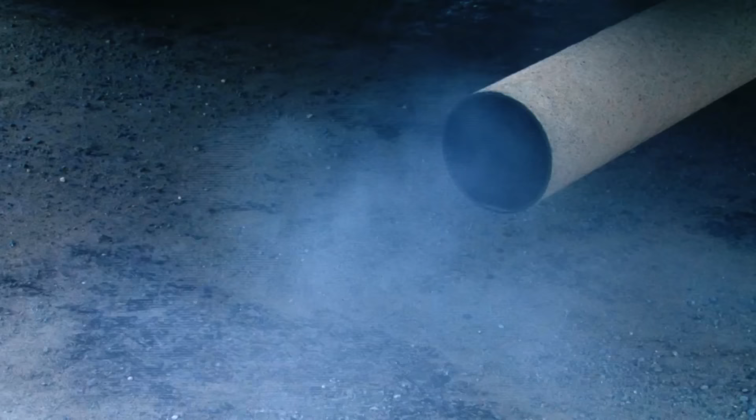But Swiss engineers like Renzo Simoni are facing a seemingly impossible problem. In recent decades, traffic has increased tenfold, and the mountain passes are grinding to a halt. Nowadays there are 1,200,000 lorries crossing the Swiss Alps every year, so we have to do something.

The Swiss solution? To bore a tunnel, the like of which the world has never seen. This is the biggest and most complex and of course most expensive project Switzerland has ever done. The Gotthard Base Tunnel will be 57 kilometers long and lie almost 2.5 kilometers below the mountain peaks. If Renzo and his fellow engineers can pull it off, it will be quite literally a groundbreaking engineering feat.

This is the longest railway tunnel we are building now here. It's 57 kilometers long, and that means it will be a world record. But constructing a tunnel of this scale is far from straightforward. We have many logistical problems. We have high overburden up to 2,500 meters. We have water which is coming inside the tunnel from time to time. We have the rock heat itself with temperatures up to 45 degrees. So there are a lot of challenges.

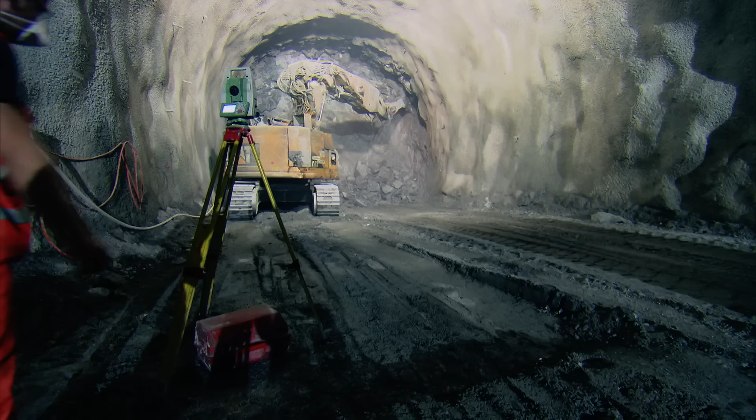While tunneling, you have different dangers. It may occur that water comes in under high pressure, big amount of water, so that could be a problem. Or if you have a collapse of the front of the tunnel with material coming down.

Dirk Kruger from Amberg Technologies is a geophysicist facing the challenge. The normal condition is that we go in tunneling quite blind because nobody has been there before. And the situation is very complex in the Alps. Geology can change from meter to meter.

The extreme depth of the tunnel rules out conventional surveying that takes samples from above. And being unable to predict the geological conditions ahead could be catastrophic. So if you have a big water-bearing zone, this is the worst case because you have tons of water which are coming suddenly. The solution to this perilous problem lies in one of history's great inventions.

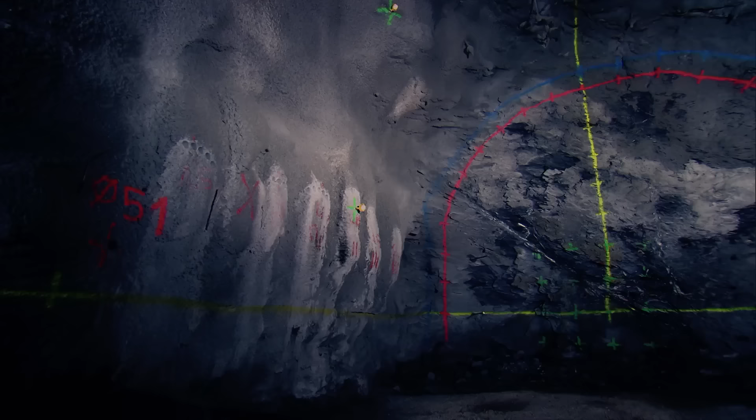Japan is the most seismically active country on Earth, with roughly 1,500 quakes registered each year. For centuries, little was understood about their cause, nor where they may strike.

That was until 1880, when, on a survey in Japan, British mining engineer John Milne experienced a severe quake and began to record their behaviour.

What I've created here is a simple demonstration of a seismograph. I've got a pen attached to a pendulum. When I shake the table and pull the paper through, you'll start to see the pen record the number of shakes on the paper, and that represents the frequency and the amplitude, or the number of times per second of the shakes and the size of those shakes.

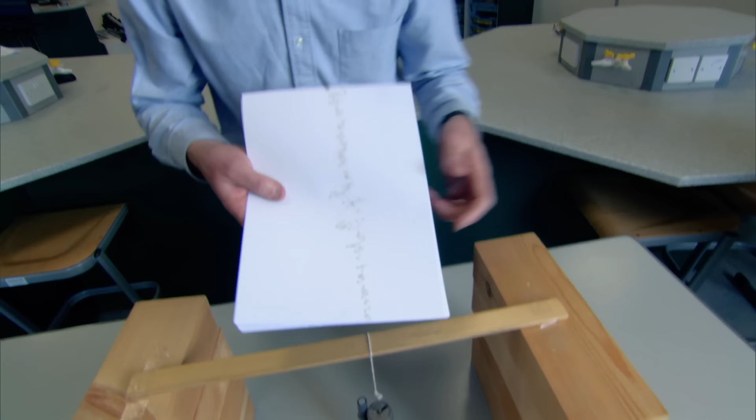So, let's give it a try. My assistant Kirk here is going to come and shake the table, and as I pull the paper through, you can start to see the trace on the paper, and then if Kirk gives it a really big shake, you can see that increase in amplitude, and then as it calms down, it gets less again. And we can see here where the really big shake was compared to the rest of the time. It's a really simple but quite effective demonstration of how a seismograph works.

John Milne and a team of engineers took this very simple concept and enhanced it, devising the first continuously running seismographs which could detect the epicenter of the quakes in Japan. A design that was taken up and used all over the world.

In order to see through solid rock, engineers building the Gotthard Tunnel will adapt Milne's innovation and make waves of their own.

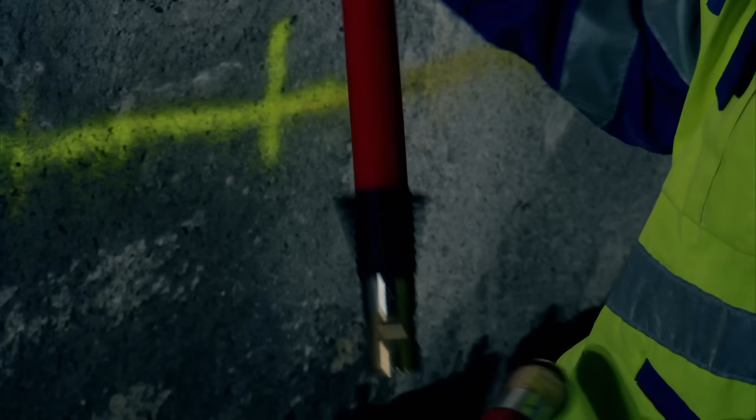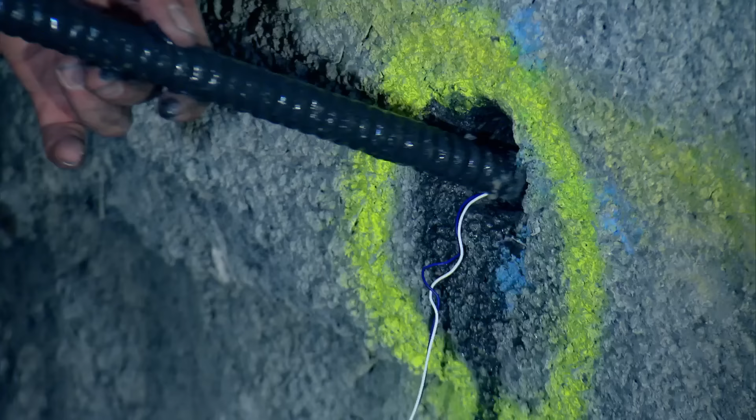Normally the seismographs are monitoring signals in Earth. Here the difference is we create a signal, a small earthquake, which creates waves traveling through the rock. At the VSH Hagerbach Tunnel Research Facility, seismic prediction experiments are undertaken for the Gotthard project. Explosive charges are placed within the rock face. Once detonated, each sends out shockwaves which are measured. This wave travels through the rock until some condition in the rock changes. Distinct geological features reflect the waves differently, providing a picture of what lies ahead.

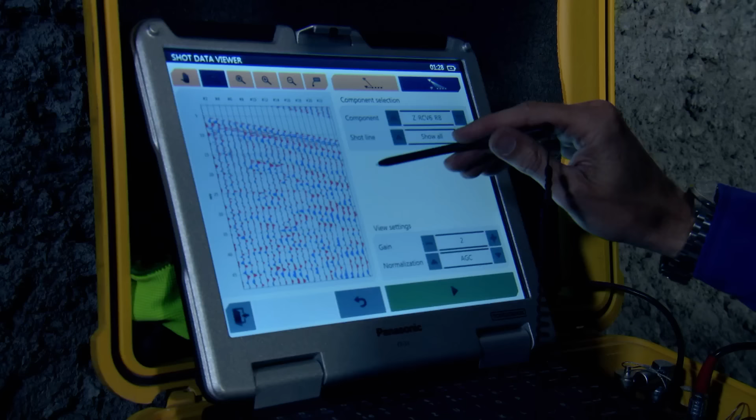Everywhere where we find these lines, there is an area where we have changes in rock conditions. In water, they travel quite slow. In air, they're more slow. With this system, we are able to have a real impact on the tunneling progress.

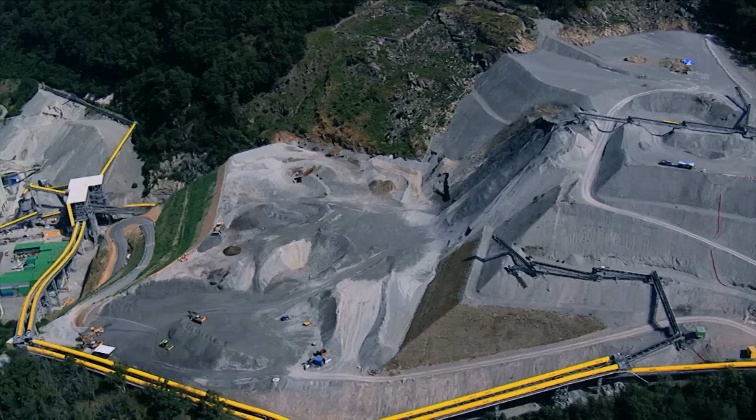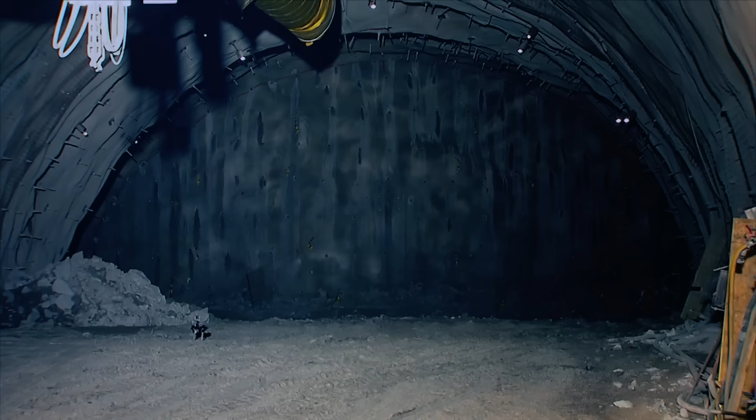Construction begins on history's most ambitious subterranean project in 1996. The route will consist of 2 tubes. To reduce construction time, the work begins from 4 sites simultaneously, with the ultimate goal that the tunnels will join up underground.

But in creating the world's longest and deepest subway, engineers will face many more challenges, and will have to draw on the innovators of the past. Now this place is really incredible, really amazing. To make the impossible possible.

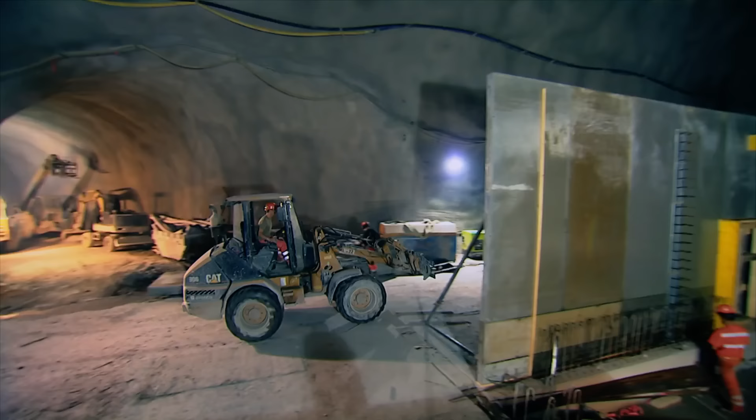In the mountains of Switzerland, engineers are undertaking one of history's most audacious construction projects: a 57-kilometer rail tunnel driven straight through the Alps. It will be the longest and deepest ever built, a feat once thought impossible. It's really a big innovation to do this. It's very, very tough. Sometimes it's like unbelievable that it's real.

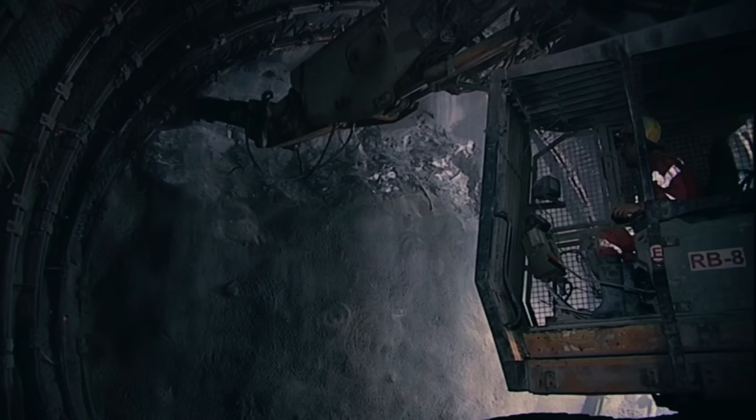Renzo Simoni is one of the team charged with turning the dream into reality. But they face a series of monumental engineering tests. It's the longest tunnel ever built. We have, of course, very different geological zones to get through. So how do you dig a tunnel that far without taking centuries to do it? It's a challenge that would have been impossible without history's great engineering innovators.

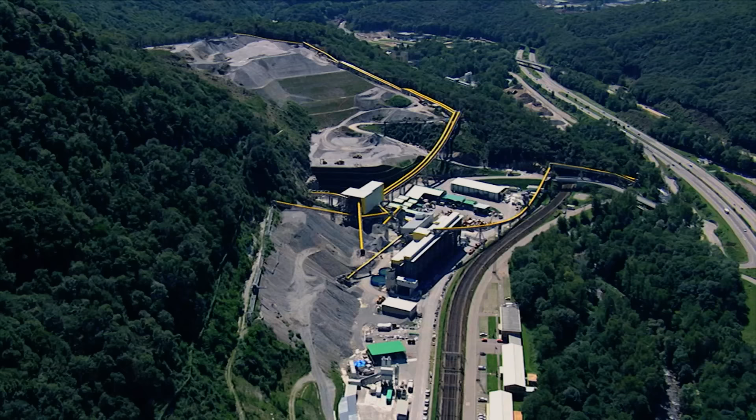London, England. Every day, 4 million people descend into a complex underground network of tunnels, more than 20 of which crisscross their way beneath the mighty River Thames. But it wasn't always so. By the early 19th century, Londoners had given up all hope of having a crossing beneath the river.

As engineer Professor Luke Bisby is investigating, several previous attempts to tunnel under the Thames had failed, and the problem was the soft and malleable London clay and sand. Hard rock miners had come from Cornwall, but the techniques they used on hard rock had failed, leading to collapse and flooding. Eventually, it was decided that the project was impossible, and it was written off.

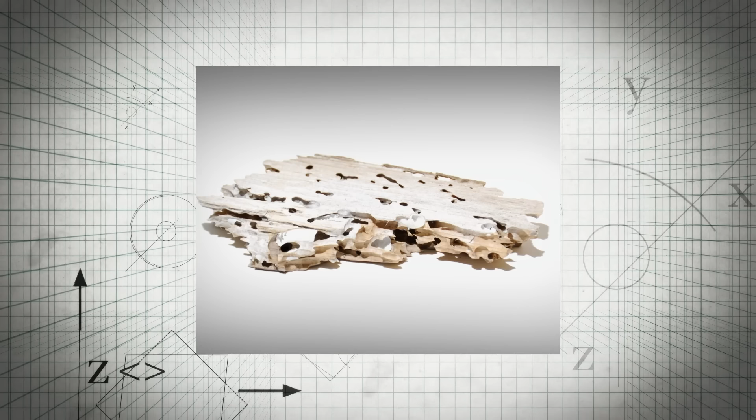But Anglo-French engineer Marc Brunel, father of Isambard Kingdom Brunel, had a brainwave. As a naval cadet, Brunel had observed the perfect tunnel-like structures left by mollusks called shipworms as they burrowed through timber.

Brunel's idea started an underground revolution, hidden remnants of which can still be found.

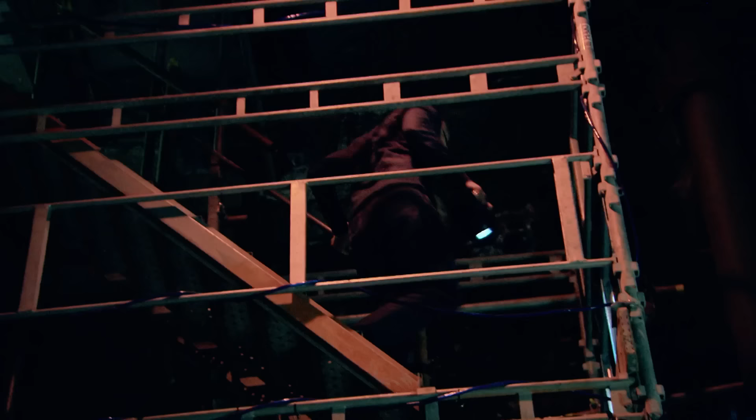Now this place is really incredible, really amazing. Through a tiny door up at the street, down a rickety old scaffolding, and we find ourselves here in this cathedral-like space. From this access shaft, Brunel drove the first ever tunnel under the Thames, using his engineering equivalent of the shipworm.

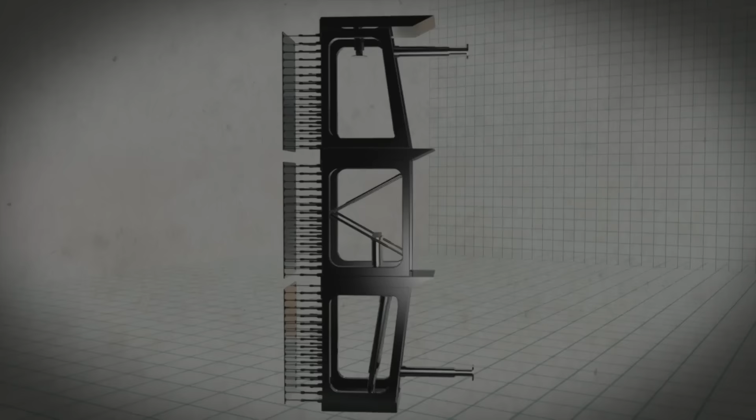A mobile steel framework called a tunnelling shield acted like the worm's hard head, supporting the earth and preventing collapse. Working in individual compartments, miners excavated just 4 inches before the whole tunnelling shield was pushed forward using screw jacks. A second group of men working behind them would be lining the tunnel with bricks to prevent its collapse.

Finished in 1843, Brunel's Thames Tunnel was hailed as the 8th wonder of the world, with almost 50,000 visitors on opening day alone. Today, it forms part of the London Rail network, and it all began in this hidden chamber. Most people would have no idea that it's here, but of course its importance to engineering and to tunnel engineering in particular really can't be overstated.

The Gotthard Tunnel will be more than 140 times longer than the Thames Tunnel, a feat that would be near impossible without Marc Brunel's innovation. In order to chew their way through the Alpine mountains, Renzo and his fellow Swiss engineers are using the modern supersized equivalent.

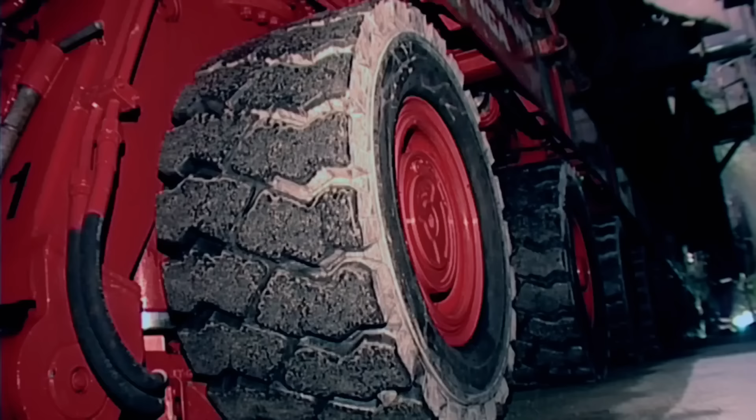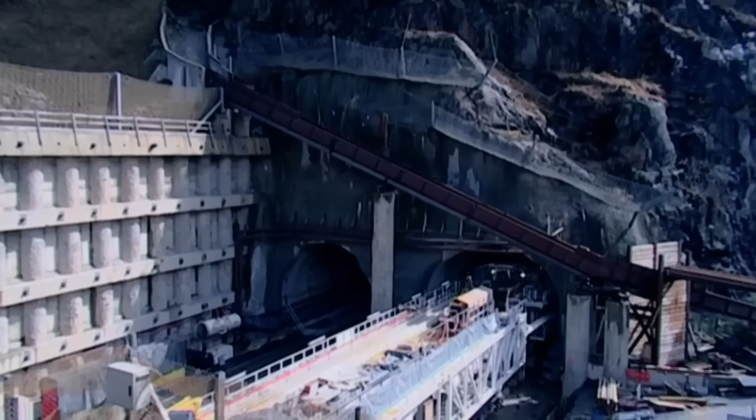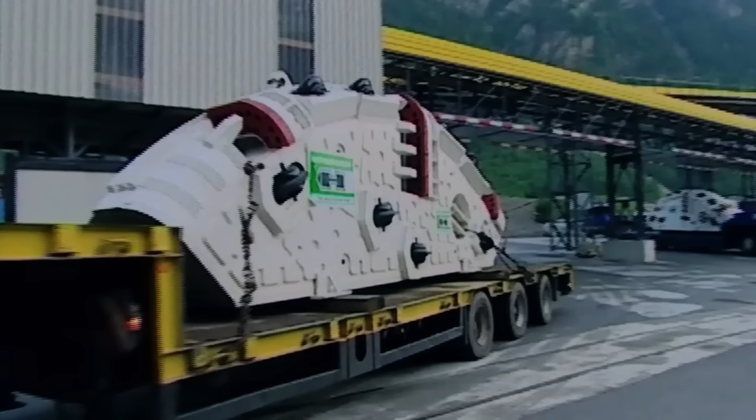These machines are really very amazing. You have to imagine it's 400 meters long, the whole machine. Almost the same length as the Thames Tunnel and weighing 3,000 tons, these tunnel boring machines, or TBMs, are some of the biggest land vehicles on Earth. So huge, they're shipped in sections and assembled on site.

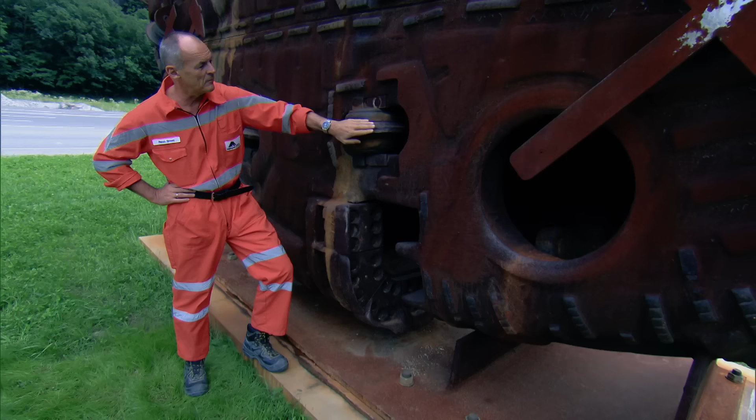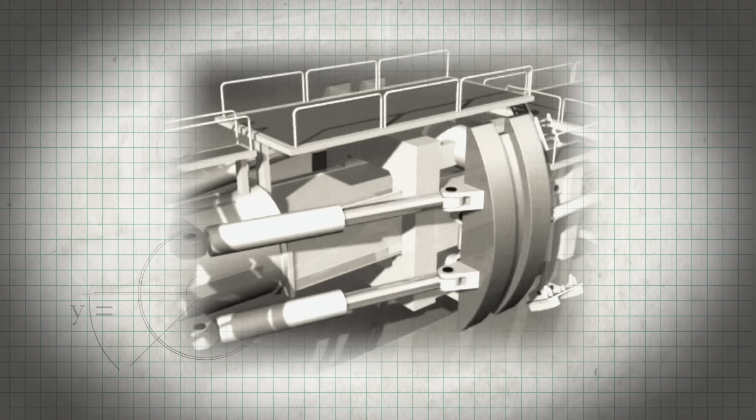This is the head which is rotating, and we have about 60 of those discs which are scraping the rock, so it advances like a worm in principle, step by step. The head turns and breaks chips from the rock, each disc exerting a force of 32 tons. The excavated rock is passed back through the machine on a conveyor. The TBM is then pushed forward into the void on hydraulic legs.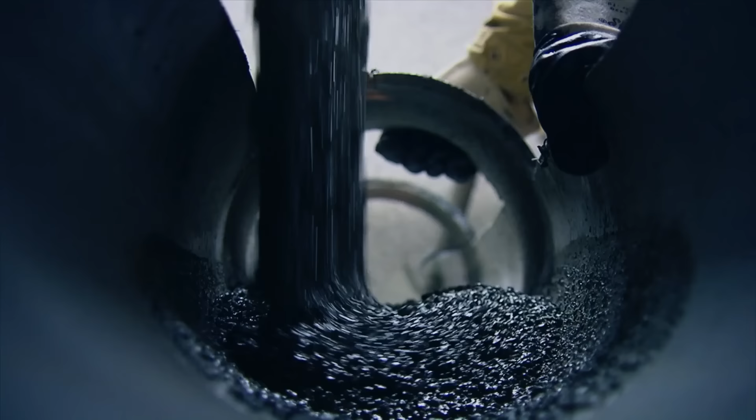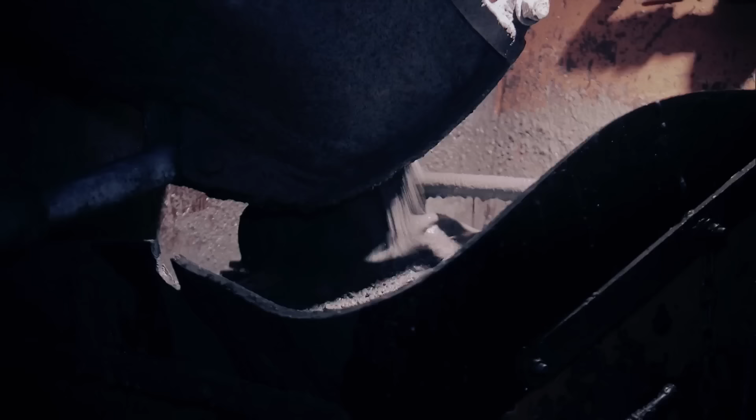20 years or 30 years ago, it would not have been imaginable. These mechanical mollusks can munch through 40 meters of rock a day. Behind it, instead of Brunel's bricks, the walls are sprayed with shotcrete, a form of liquid concrete. Shotcrete is the first safety measurement after excavation and is applied at the walls to assure that no pieces of rock is falling down. With this shotcrete lining, the tunnel is safe.

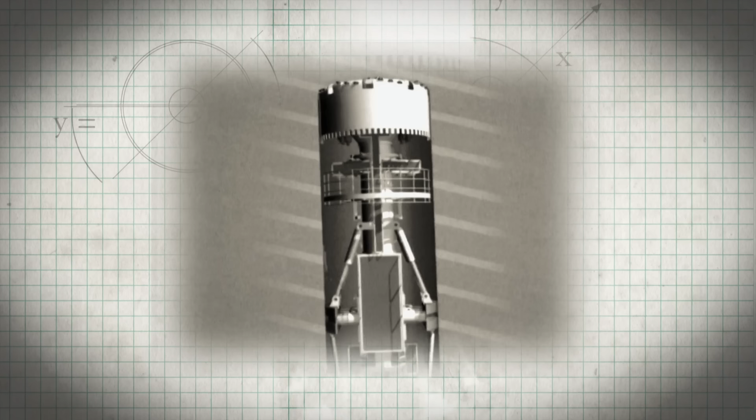The giant TBMs carry all the equipment and materials required to bore and reinforce the tunnel. Automation undertakes many of the tasks that Brunel's bricklayers once did. All in all, they measure the length of 4 football pitches stretched end to end.

Figuring out the direction to send these mighty machines is its own challenge. Calculating a straight route can be difficult enough on the surface of the Earth. There are trees, hills, and other obstructions to overcome. But it is possible to use landmarks to navigate, or build towers to get direct sightlines. Finding your way beneath the Earth, where even the slightest miscalculation could result in disaster, is surely impossible.

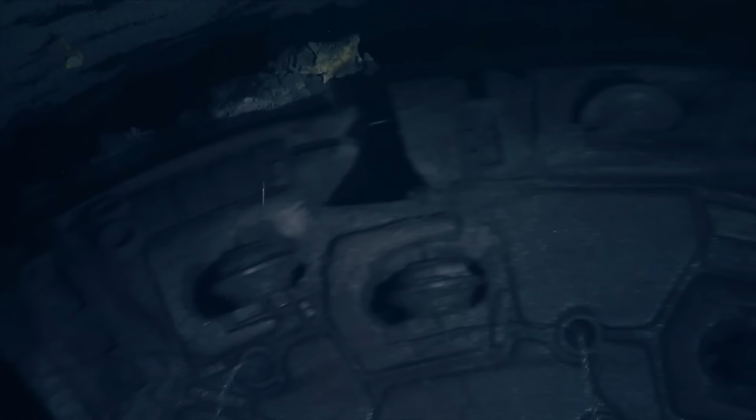Getting the TBMs meeting in the middle is a very, very big challenge because we have so long distances. The solution relies on one of the greatest innovations of the 20th century.

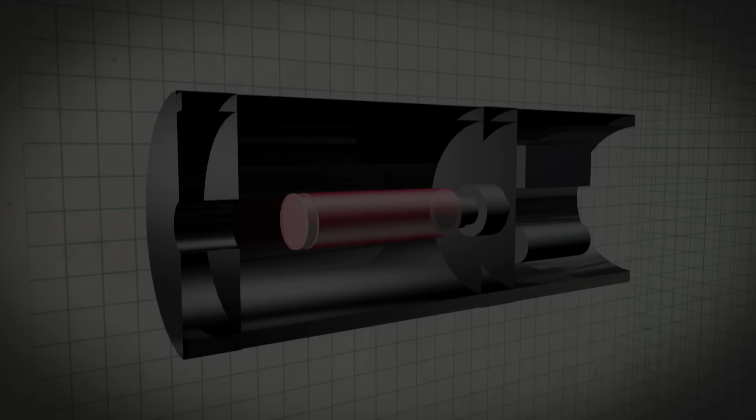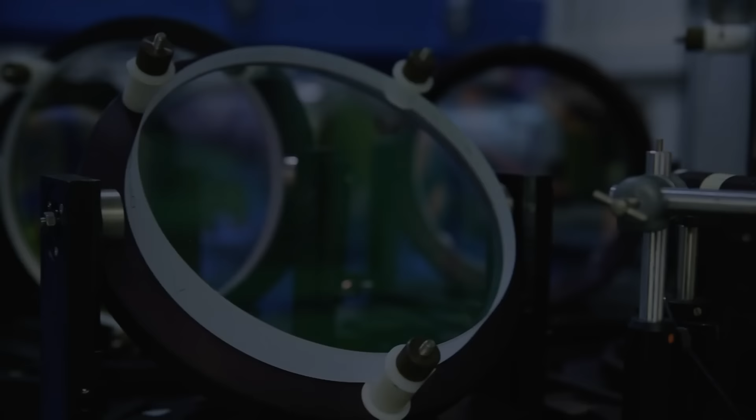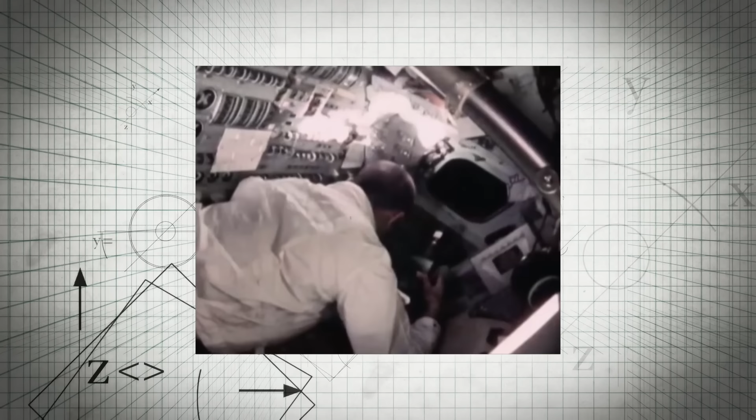In 1960, American Theodore Maiman built the world's first laser, out of basic materials he bought from catalogues. Placing a small ruby within a photographer's flashbulb, he was able to excite atoms, causing them to emit light particles called photons. His creation would change the world, allowing highly accurate measurements to be made over great distances. Less than a decade after Maiman's prototype, lasers were bounced off reflectors on the surface of the Moon, so the Apollo 11 mission could accurately calculate its distance from Earth for the first time.

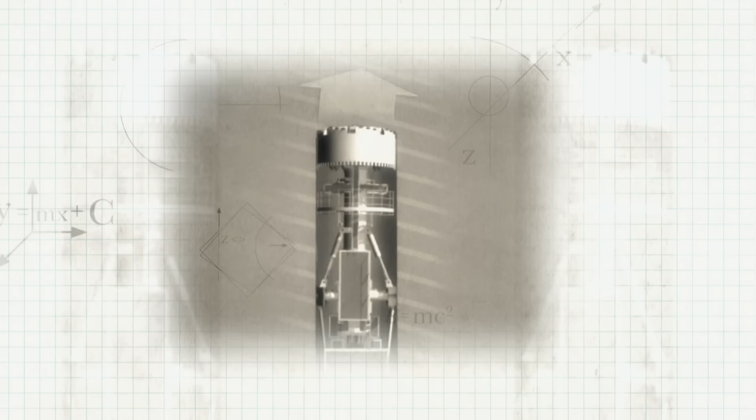In Switzerland, guiding the huge boring machines will only be possible with the help of lasers. First, GPS is used to map the entire route. But with no satellite signal below ground, each TBM relies on a geodetic guidance system, using incredibly precise measurements to stay on track.

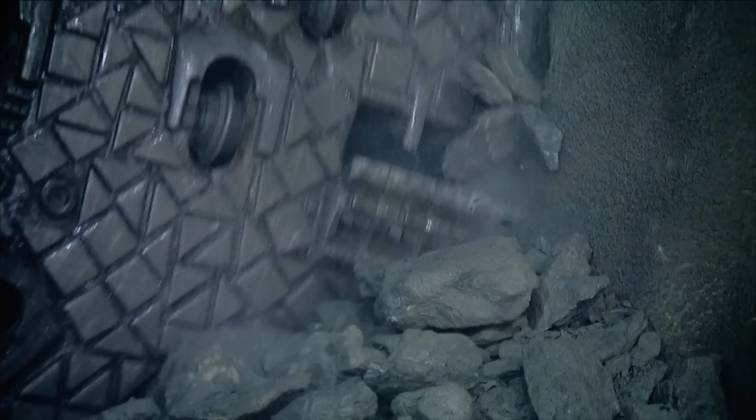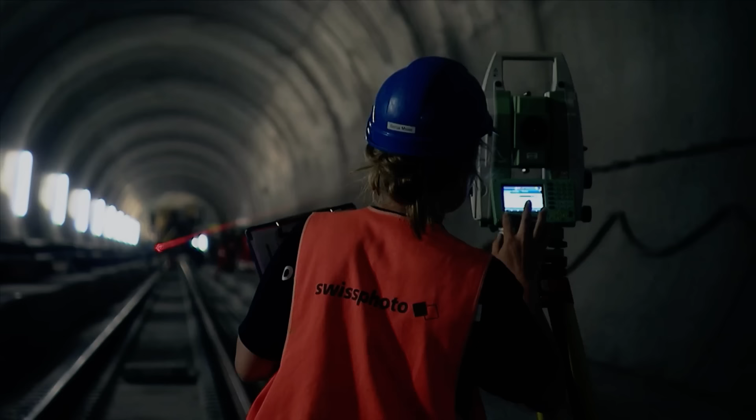You are measuring the angles and the distances, and this is trigonometry. A laser theodolite is attached to the tunnel wall and fires a beam at a target on the front of the TBM. The laser pointer indicates the precise direction, so the commander of the machine always has control, and he can choose very, very small corrections.

But with 57 kilometers of mountain ahead of them, Renzo and the team won't always be able to rely on the massive TBMs. Let's get out of here. They will have to draw on more innovations from the past to make the impossible possible.

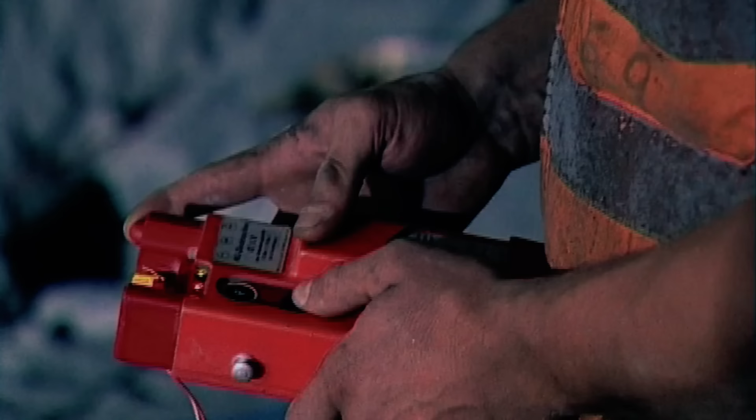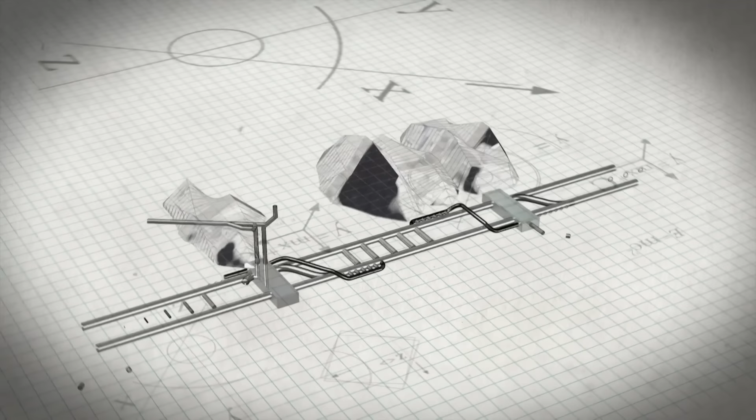In Switzerland, engineers are undertaking one of history's most audacious construction projects. To reduce alpine gridlock and pollution, they're attempting to build the longest and deepest rail tunnel in the world. For Switzerland, it's very important to reduce the traffic by freight lorries crossing the Alps. The Gotthard Base Tunnel will slice a 57-kilometer route not over the Alps, but straight under them. With our tunnel project, we bring the northern and southern parts of Europe closer together.

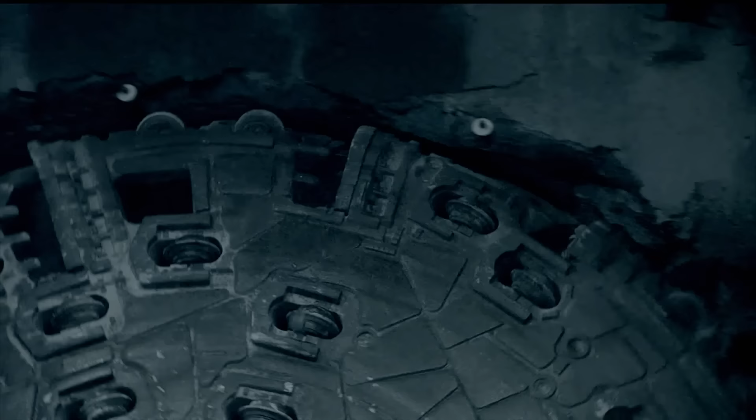Cutting-edge surveying guides the giant tunnel boring machines, or TBMs, through the mountainside. But digging a tunnel deeper than anyone has attempted before leaves Renzo Simoni and the engineering team facing another seemingly impossible challenge. One that the TBMs can't overcome.

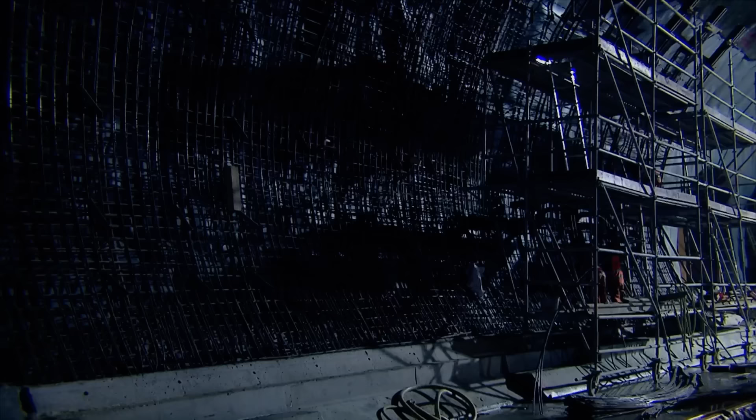You can use tunnel boring machines only in conditions where you have hard rock, which is not squeezing. If you have pressure on the machine, it wouldn't work anymore. That would be a problem. So you can use those machines only in very good rock conditions.

Squeezing occurs when the pressure of the mountainside combines with weaker rock types. In extreme cases, it can result in the tunnel closing up again after it's been bored. Squeezing rock is like if you make a dough at home and then you put a finger on it and took the finger out, then it tries to close.

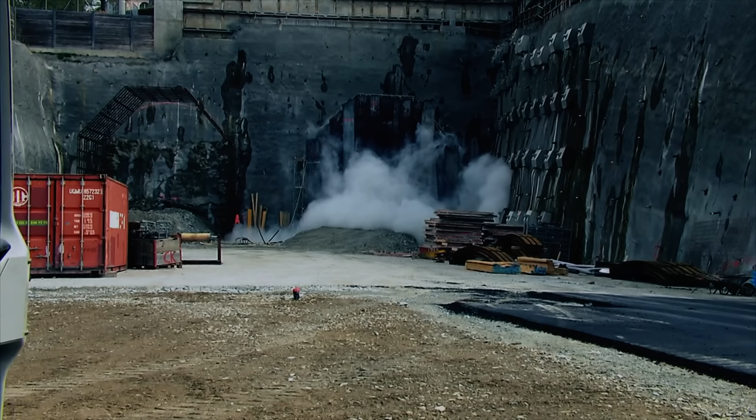If the team use a tunnel boring machine in the squeezing rock zone, the consequences could be disastrous. The solution is to go back to basics, and a technique that would have been impossible without one of history's great innovators.

Engineer Luke Bisby is in Cornwall, on the southwest tip of Britain, exploring an area once critically dependent upon tunnelling. It's hard to believe that 200 years ago, underneath the sea, was the largest concentration of submarine tin and copper mines anywhere in the world. It's been estimated that all told, there's between 50 and 60 kilometers of tunnels out there underneath the waves. In the 19th century, this tiny county was the world's largest producer of copper and tin, the crucial materials of the Industrial Revolution.

More than 2,000 mines like this one would have dotted the county. Cornish miners were considered the best in the world, and their expertise was sought in tunnelling projects all over the planet. But by today's standards, their methods were incredibly inefficient.

Mostly, the Cornish tunnels were hewn from the rock by hand, the only alternative being primitive explosives. So this is black powder. This is the world's first chemical explosive. Better known as gunpowder, early miners would laboriously bore holes by hand in which to lay their charges.

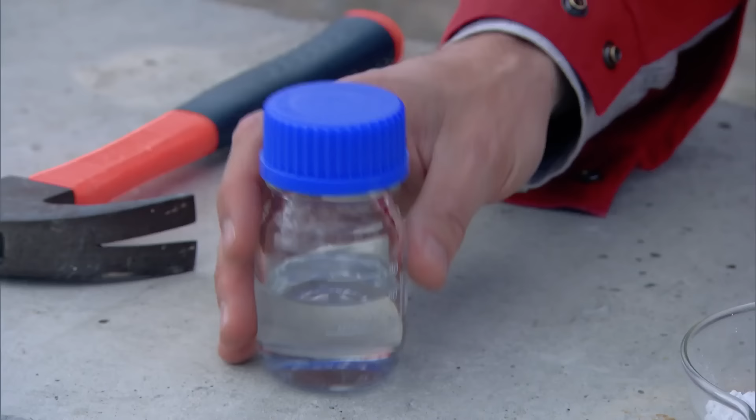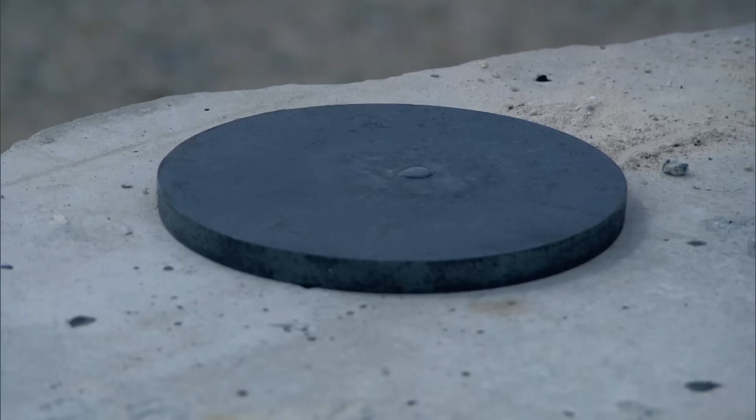The invention of a new, more powerful explosive proved even more perilous. So what I have here is a jar of nitroglycerin, and it was first synthesized in 1847. You can see just how volatile it is if I take a small drop and place it on this steel plate, and then I hit it with a hammer. So where black powder needs a heated charge in order to coax an explosion, nitroglycerin just needs a small tap. And of course, down a mine, that could spell disaster.

In 1867, it was Swedish explosives expert Alfred Nobel, spurred on by the death of his brother in a nitroglycerine accident, who finally managed to stabilize it and create an explosive that would change the world. He realized that if he took nitroglycerin and mixed it with kieselguhr, a naturally occurring clay-like material, he would end up with dynamite. You can see that it's quite loose but quite malleable, and it could be rolled to eventually form dynamite sticks.

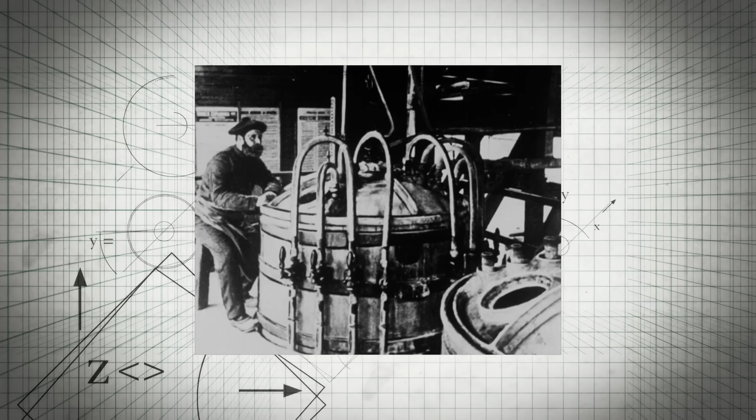Nobel's next challenge was mass production - how to safely handle the vast quantities of nitroglycerine needed to make the new dynamite. In Ardeer, Scotland, he found a solution. Nobel really favored this area because of its remoteness, and the sandy soil allowed him to shape the landscape around his factory to protect production workers from potential explosions. It also allowed him to build mounds such as these around us, and on top of these he could place his nitroglycerin production huts. In each nitroglycerin hut, one man was in charge of monitoring the temperature and another mixed, sitting on a one-legged stool to ensure he kept his focus.

Its sensitivity to temperature and friction meant that nitroglycerin couldn't be safely pumped, and so it was set to trickle down from the huts to the factory, letting gravity do the work. Once it reached the factory, it was mixed with the absorbent clay before being rolled into sticks of dynamite. Nobel had created a product that was now so stable that it could be dropped on the ground or even thrown into fires without exploding.

The new dynamite, combined with the invention of pneumatic-powered rock drills, led to a much quicker and efficient form of tunneling called drill and blast. All right, that's it. Let's get out of here. And it ushered in a new age of mining.

3, 2, 1, firing! Wow, so that was quite something. A lot of power in that one. So we can really see here the power of the dynamite as compared to the black powder. The dynamite has taken that entire mass of rock and thrown it sideways. You can see what a game changer this would have been for the miners working down here.

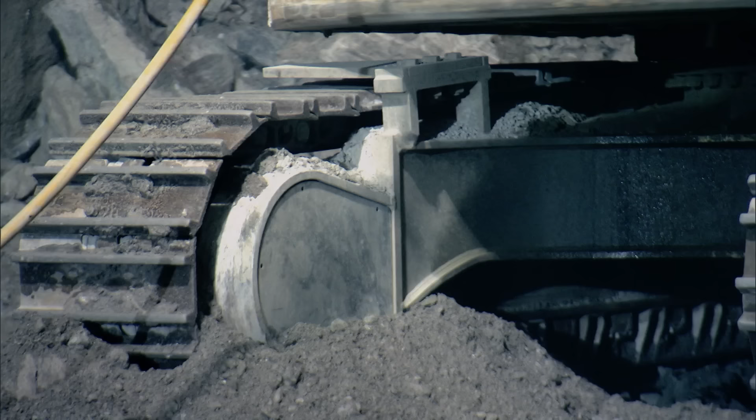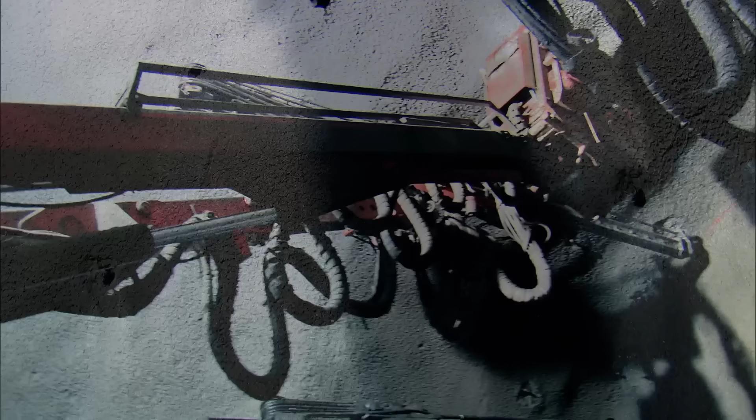Wherever engineers at the Gotthard Base Tunnel encounter zones of squeezing rock, they revert to the tried and tested drill and blast methods pioneered in the 19th century. Only they give the technique a 21st century twist. Specially designed 60-ton drilling rigs, known as jumbos, make the task quicker than ever before. They are very fast. They need just a few hours to bore all the holes needed. Each 3-meter-long arm has a powerful electro-hydraulic drill to bore holes for the explosives. As one arm drills, the operator lines up another ready to bore the next hole.

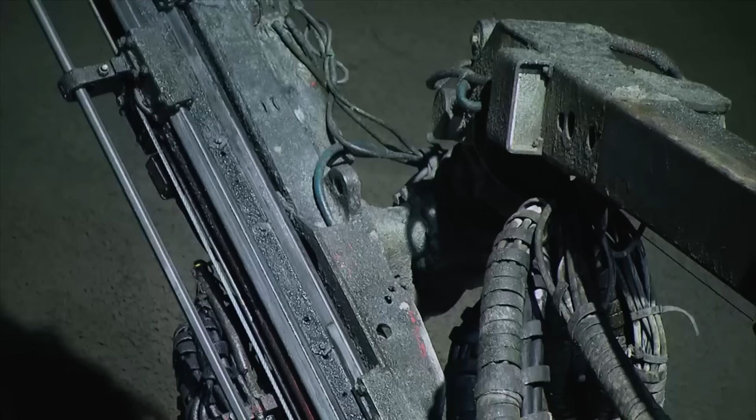The boring jumbo is able to make different borings at once. In the past, you only had one and it was carried by man. The productivity of such a jumbo is much higher.

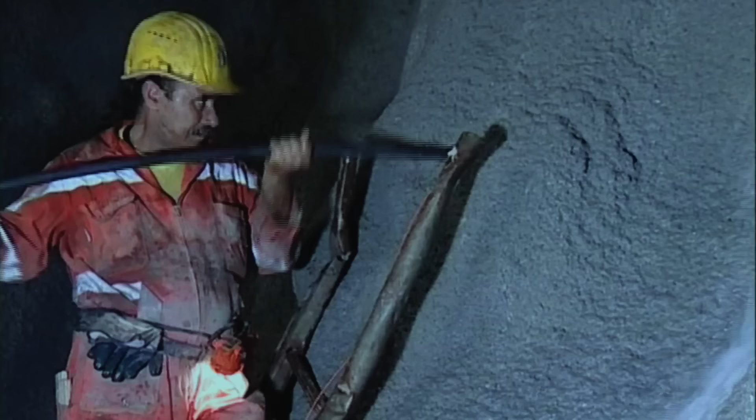Unlike dynamite, modern emulsion explosives only become active when mixed together at the rock face, making it much safer than traditional drilling and blasting.

So this lorry, although it's carrying the explosive, it's not dangerous because for detonation you need two compounds. In this lorry is only one compound now.

Each detonation takes 8 hours to prepare, making drilling and blasting much slower. But constructing the tunnel without it would be impossible.

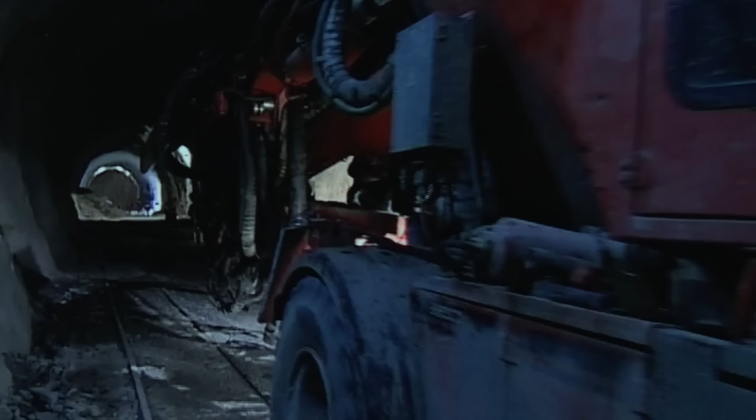The TBM is faster in good rock conditions, but if rock conditions are not so good, you come through with this method. If you cannot do it with drilling and blasting, you can't do it at all. Two, one, go!

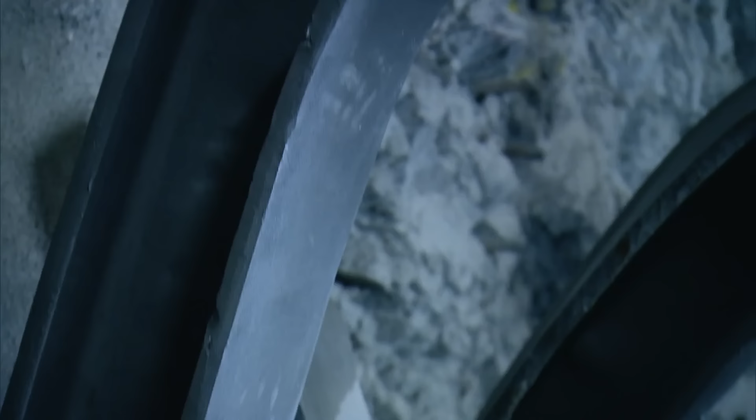Once the team have blasted their way through the obstacle of the squeezing rock, they still have to deal with the mountain's natural inclination to close the new tunnel back up.

Tests are done to see if rigid steel arches will hold back the enormous pressure. We saw that the steel began to deform. We knew immediately that we had to take countermeasures, because otherwise our tunnel would be closed completely.

With the success of the project in jeopardy, the answer lies in a historic innovation. In 1932, engineers Heinrich Toussaint and Egmont Heintzmann revolutionized the German coal mining industry when they invented the TH-yielding steel arch support.

Capable of withstanding huge pressure without collapsing, their innovation made it possible to excavate deeper than ever before. Unlike a conventional rigid steel arch, the jointed concentric rings of their design change shape to accommodate the pressure of the rock, rather than totally resisting it.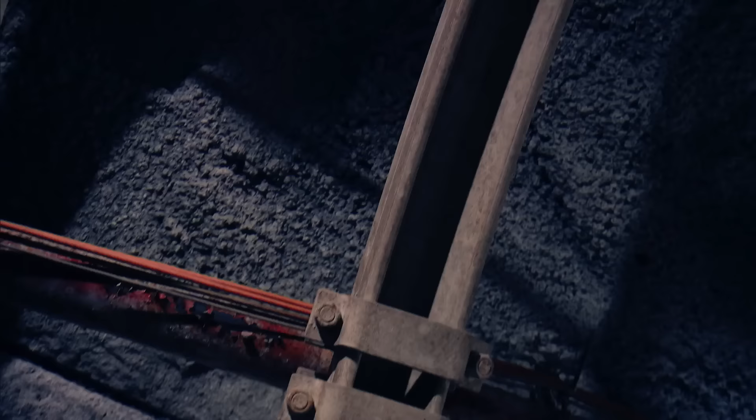It's not the steel itself which is deformable, it's the joint of the steel. All of these joints could move into each other 50 to 60 centimeters without collapsing.

The solution is to bore a tunnel with a wider circumference than is ultimately required. The yielding rings then allow just enough movement to prevent the supports from collapsing, while still resisting the pressure of squeezing rock enough to stop it from closing the tunnel completely.

This simple engineering, inspired by the past, is solving a seemingly impossible problem that might otherwise turn the tunnel into a historic failure. Without this kind of steel arches in the squeezing zone, we would not have been able to build it.

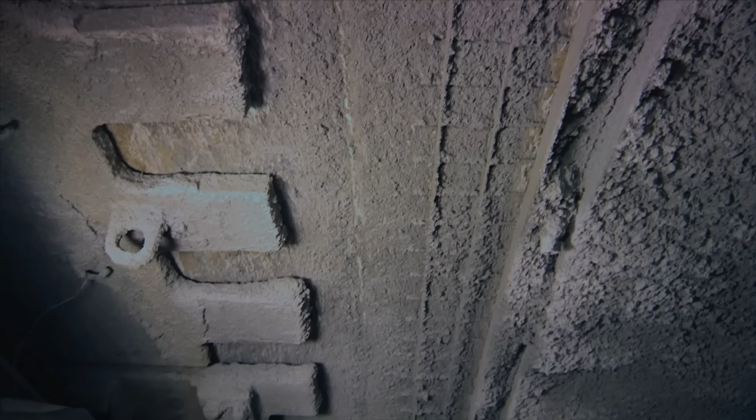On the 15th of October 2010, after 14 years of digging, boring and blasting, the dream becomes a reality. A TBM crashes through the final few meters of rock, the two halves of the tunnel joining for the first time.

Breakthrough was a very special moment. The last parts of the rock came down and we could see the machine behind.

After excavating more than 114 kilometers of rock, thanks to the laser guidance system, the TBMs complete their monumental job with incredible accuracy. In the end, they reached a result like this: 1 centimeter vertically and 8 centimeters horizontally, and this was a very, very big result.

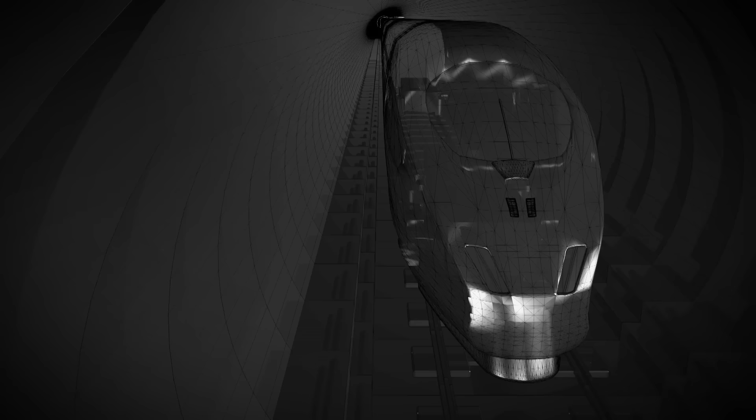With the digging done, a new team of engineers and technicians must now make the tunnel safe for the thousands of trains and passengers who will pass through. A huge challenge that will only be achieved by looking back to the innovators of the past.

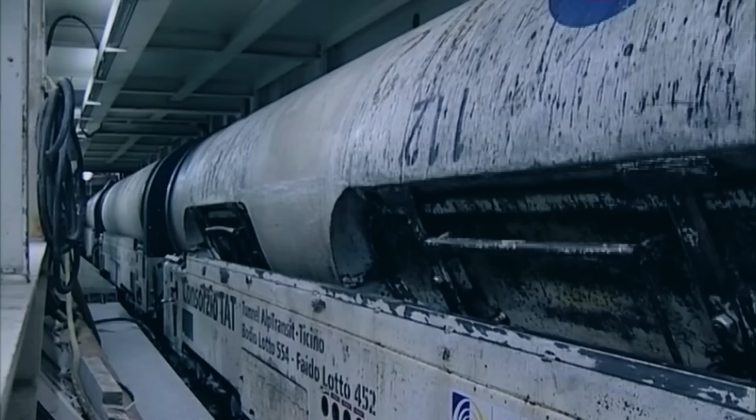Due to open in 2016, the Gotthard Base Tunnel in Switzerland is a true feat of underground engineering. Breakthrough meant that we have created a world record, because it's the longest railway tunnel now.

It's amazing. But the tunnel's monumental scale presents its engineers with one more seemingly insurmountable problem: how to keep the passengers travelling within it safe. It was one of the biggest challenges to find a tunnel system which guaranteed safety.

With huge volumes of passengers and freight travelling at high speed through a confined space, under 2.5 kilometres of solid rock, accidents could be catastrophic. I would say fire is the worst case inside the tunnel.

For Renzo and his team, memories of one of Europe's worst road disasters in another alpine tunnel are at the forefront of their minds.

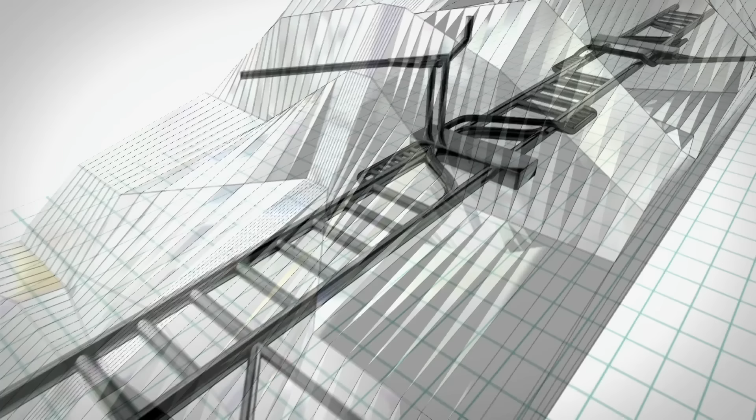In 1999, a lorry caught fire halfway through the 11-kilometre-long Mont Blanc tunnel, linking France and Italy. The tunnel quickly filled with poisonous smoke as the blaze engulfed over 30 vehicles, in an inferno which raged for more than 2 days.

Of the 39 people who lost their lives, most died from smoke inhalation. To ensure the Gotthard Base Tunnel will be one of the safest ever built, its engineers have taken inspiration from the innovations of the past.

In the UK, a groundbreaking engineering project below Liverpool's River Mersey changed tunnel safety forever. Professor Luke Bisby is experiencing it firsthand. So this is the Queensway Tunnel, and when it opened, it was the biggest and longest underwater road tunnel in the world.

Opened in 1934, it took 1,700 men over 8 years to construct. But it's not the digging of this tunnel that makes it revolutionary. About 30,000 cars travel through this tunnel every day, and even with modern exhaust systems, that's a lot of fumes. The engineering innovation in this tunnel is what solved that.

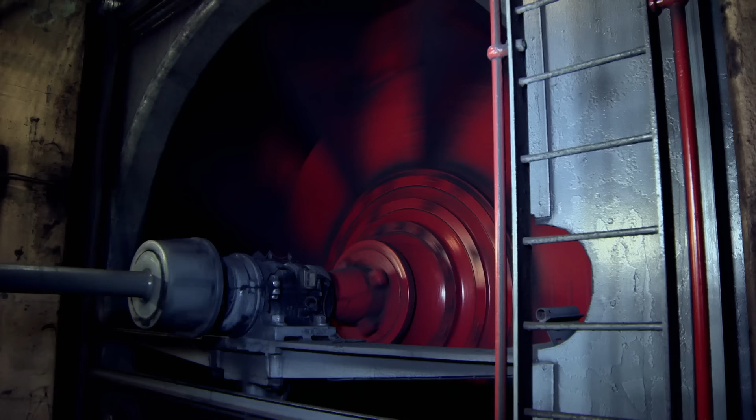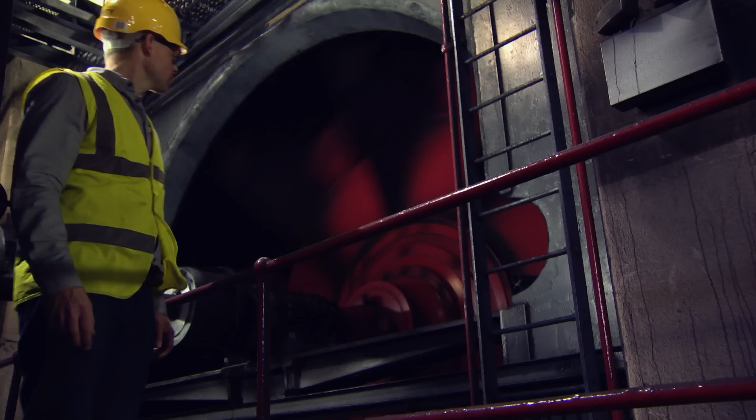The George's Dock ventilation tower is home to 6 of the massive fans circulating air through the system. This one right here is 8.5 meters in diameter, and incredibly, these are the original fans that were first installed down here almost 100 years ago. Each one can move 100,000 cubic feet of air a minute, safely pumping exhaust fumes from the top of the 60-meter-high tower above.

Now, this is a place that very few people get a chance to see. I'm standing right at the bottom of one of the ventilation shafts. The huge height of the tower ensures the air supply isn't contaminated by vehicle exhaust fumes from the street, and it's said that the air down here is even cleaner than the air for the people walking around in the streets of Liverpool.

Once the largest bore ever drilled, the road deck actually forms only the top half of the original tunnel. Most people, when they drive through the tunnel, think they're at the bottom, but they're not. Actually, below them is this 2-story high space called Central Avenue.

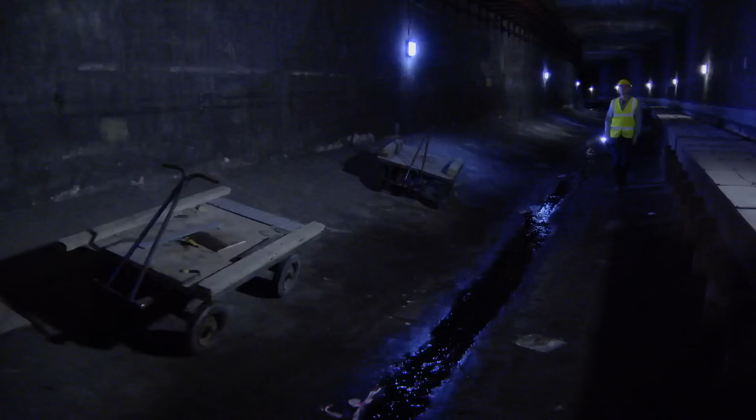Designed to house a tram line never built, it now serves as the main air supply duct, where air drawn from the tower is blown into the road deck above. It's pretty amazing to think that there's this space like this down beneath the road deck, and pretty cool to be down here. With its revolutionary ventilation system, the Queensway Tunnel provided the blueprint for all tunnel design that came after it.

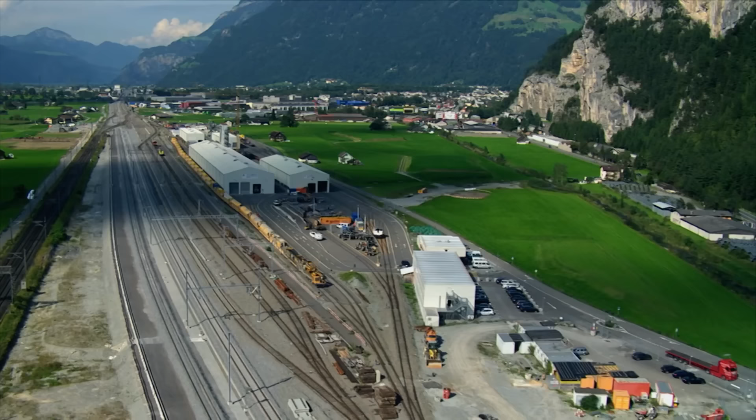The designers of the record-breaking Gotthard Base Tunnel have taken the systems pioneered under the River Mersey and brought them to new heights of sophistication. Electric trains will run through the tunnels so they won't have to contend with exhaust gases, but the potentially catastrophic effect of fire requires a cutting-edge solution.

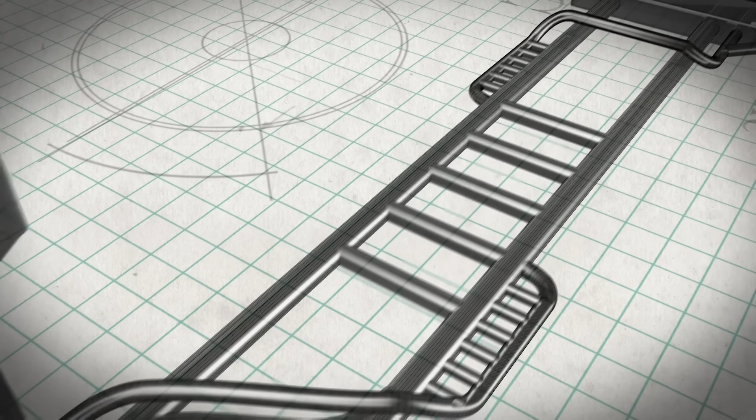First aim is that the train leaves the tunnel. If this is not possible, second aim is to get to the multifunction station. In the event of a fire, trains will either be diverted out of the affected tunnel at 2 crossover points along the track, or directed to one of 2 emergency stations. These 2 multifunction stations are very, very important for the safety of the overall system.

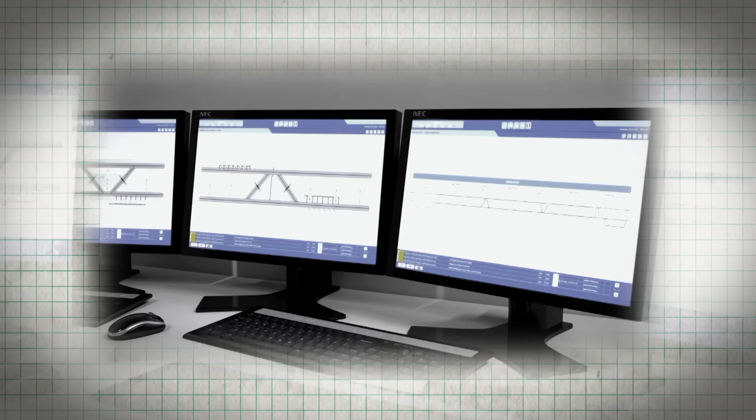As a train approaches, the station's ventilation system will be activated remotely from the tunnel control center. Powerful 2.5 megawatt extractors above the track will suck toxic fumes out of the tunnel, releasing it at the surface through an 800-meter high exhaust shaft, as 0.5 megawatt inlet fans replace it with clean air.

The ventilation system can bring fresh air into the tunnel at 250 cubic meters per second. At each of the tunnel's portals, 6 40-kilowatt jet fans will raise the air pressure in the unaffected tunnel, keeping it free of smoke during the evacuation.

People who have to leave a train come here through the connecting gallery and into the other tunnel, which is not involved in an incident, and wait until a rescue train will come. This system is safer than the rest of the railway network in Switzerland. If you are here as a passenger using the tunnel, you are safer than outside.

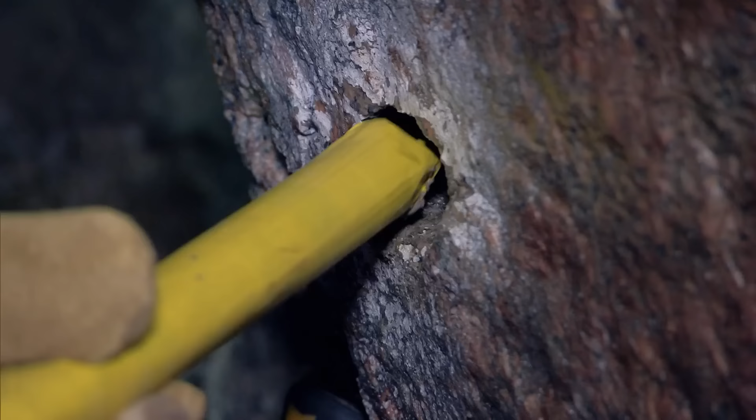This project will last for generations. It's a project of a generation, for more than one generation. By drawing on the innovations of the past, adapting, improving, and making groundbreaking innovations of their own, the engineers and designers of this incredible tunnel have succeeded in making the impossible possible.

Generations of engineers wouldn't have been able to do this. I am very lucky to have spent 20 years of my professional life together with this project. It's like a part of me.